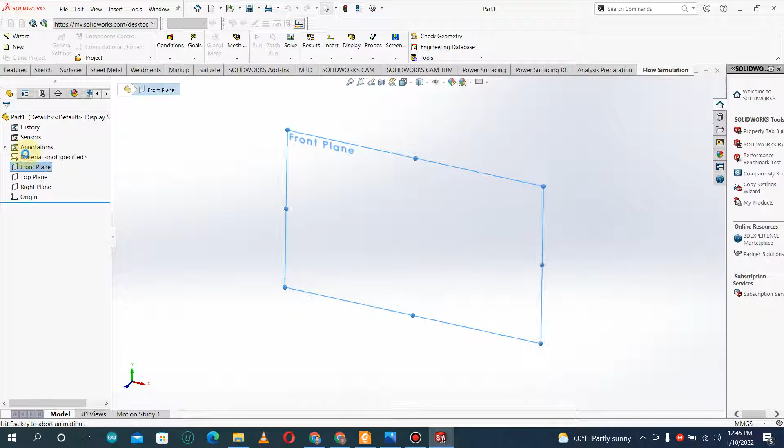Opening the part, this is Solidworks 2021. First of all, I will take an image as a reference in the Solidworks work plane and draw on it. So I have to draw the image in the front plane. I go to the front plane, sketch, and use the sketch picture command. I click sketch picture and browse to where my picture is located, then open it.

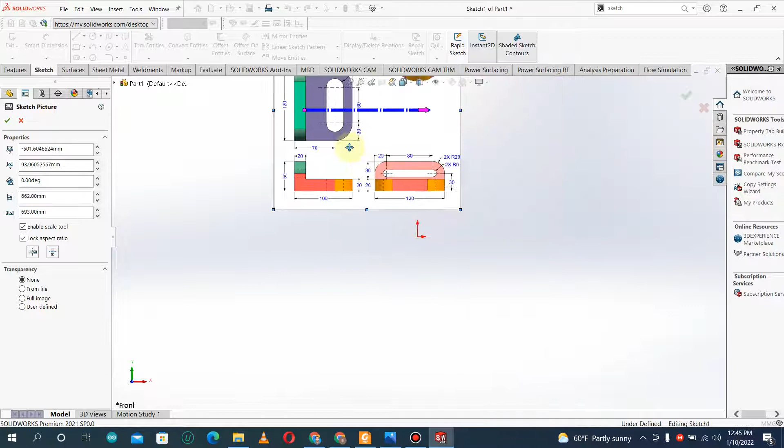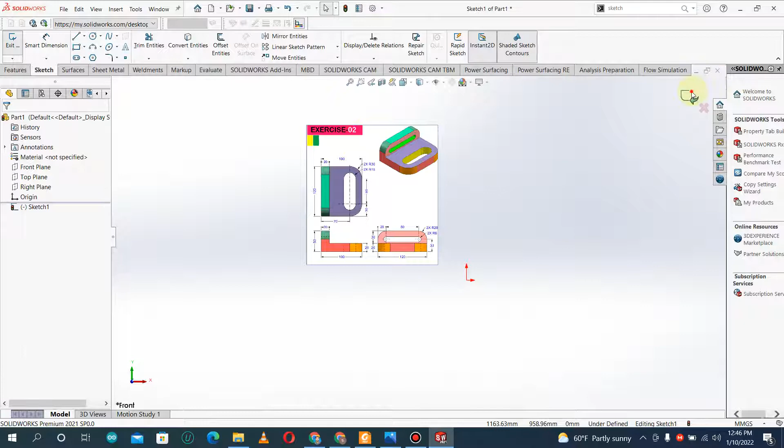This is like a reference instead of opening the file back and forth, looking at the picture and then drawing, which is tiresome. So for that purpose I put the whole image here so we can continue referencing it. I exit the sketch, go back to the front plane, and edit sketch.

This is a third angle projection, showing the front view, top view, and side view, and this is our isometric view. First of all, I'd like to go to the front plane view and start sketching.

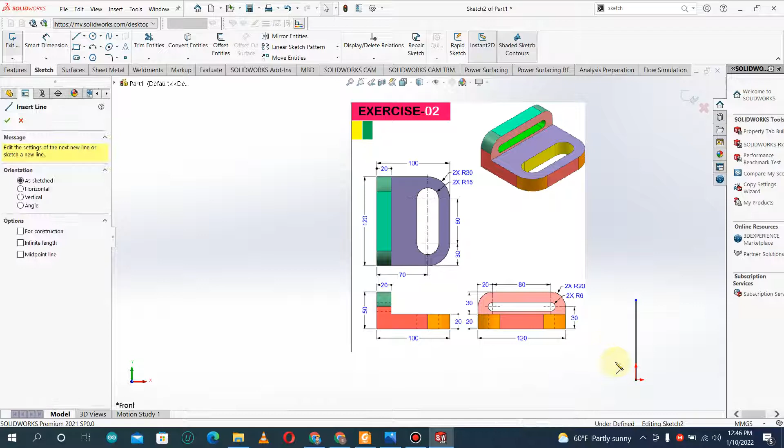I draw a rough line here at an angle of 90, and again a line. You can select the line tool with the command L. Again line, and now I am going to make an offset.

This is a new command for an offset distance of 20 mm. I zoom out and zoom in, click here, and make it 20 mm. So it is now 20 mm.

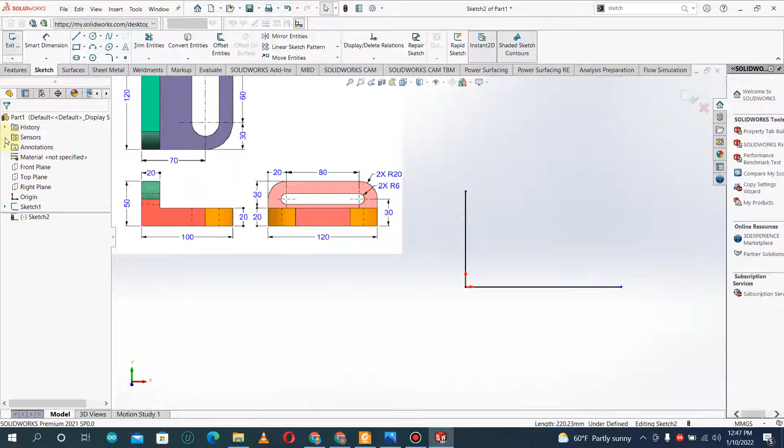Let me put the dimension before that: 100 mm, and it's 50 mm. Now I have to put an offset of 20 mm, and I have to reverse it, so it is reversed, right?

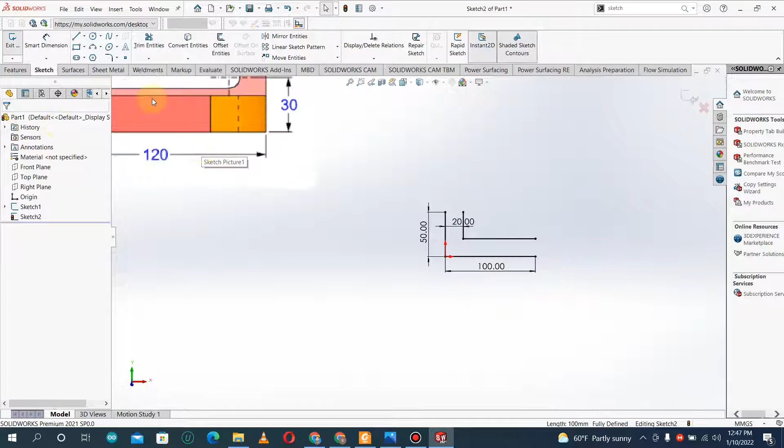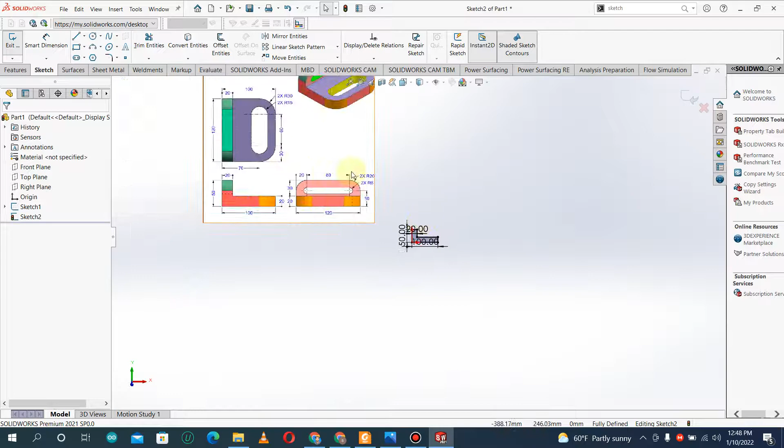Now just draw the line over here, click here and here. Again click L, the line will be automatically selected, and draw over here. So how much this front view is extruded outside - you can see it is 120, so I extrude it 120 mm.

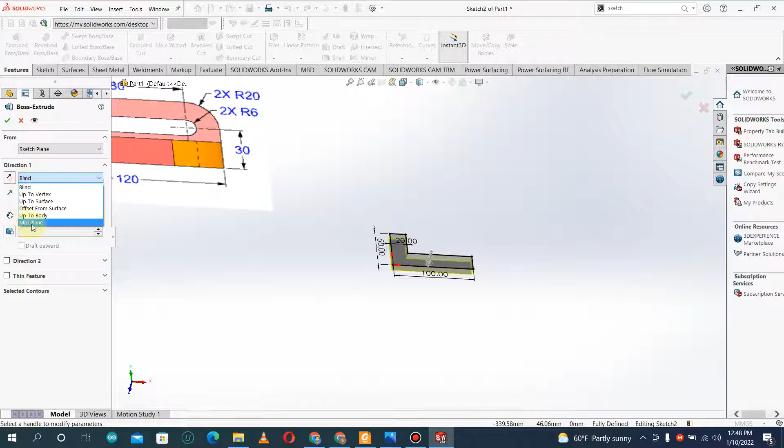Go to the feature, extruded boss. There are different types of extruded boss, so I go to mid plane. It was 120, so I keep it 120. The front plane is here, so it's 60 to one side and 60 towards my side, totaling 120 mm.

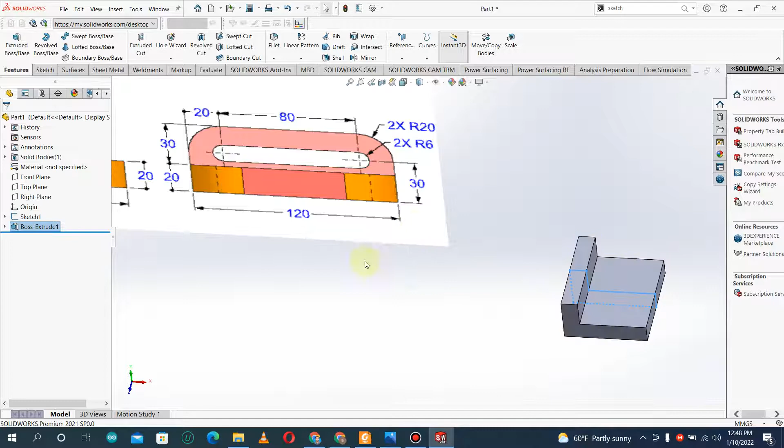So it is done. Now what we have to do is use fillets. It is given as R20.

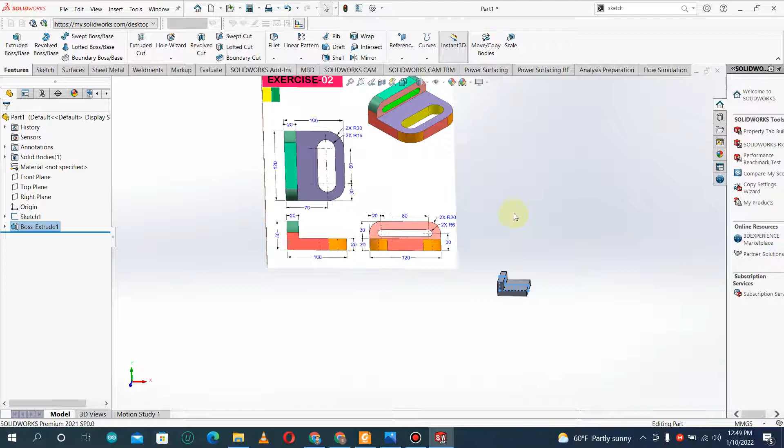First of all, we put the slot over here, right? Then we'll go for the end stuff, that is the fillets. So we will create this hole using the extruded cut command. For the extruded cut we first have to draw the sketch, and we will draw a straight slot. A straight slot would give us this kind of structure.

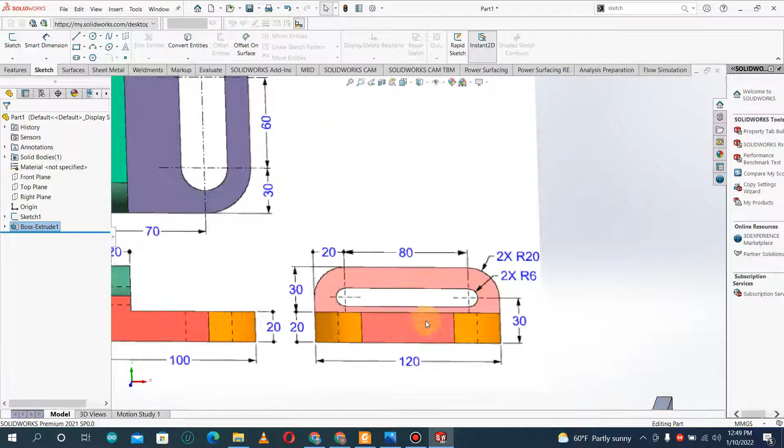First of all, I go to the side view and check this - it's R6 and 80 mm. I go to the right plane, edit sketch, and then use the center point slot or straight slot, adjust straight slot.

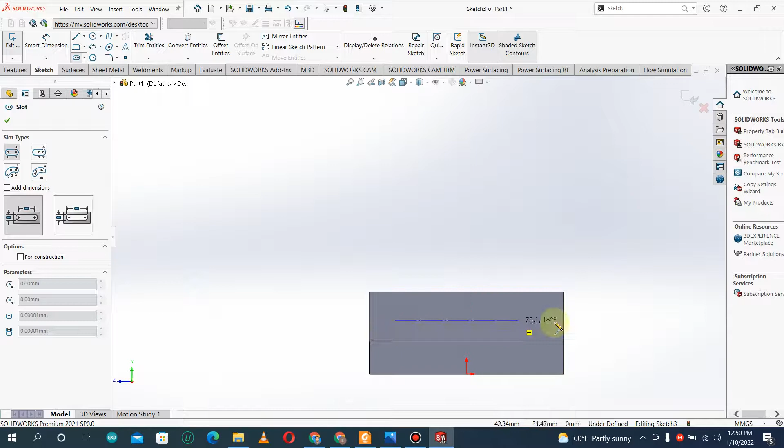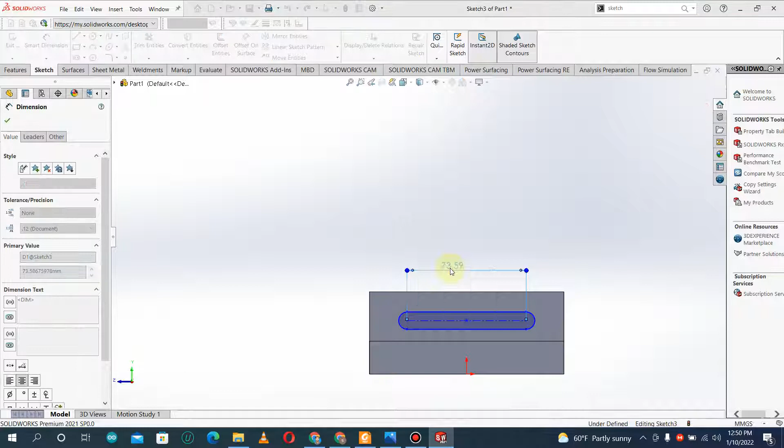You can see just here - now make it perpendicular by clicking this. Now it is centrally aligned. I'll select this and select this, as it is 80 mm, so I put 80 mm, and again R6, so I put R6.

One more thing - where did the sketch go? I can't see the sketch. Can we exit? I go to the sketch and oh yeah, now I got it.

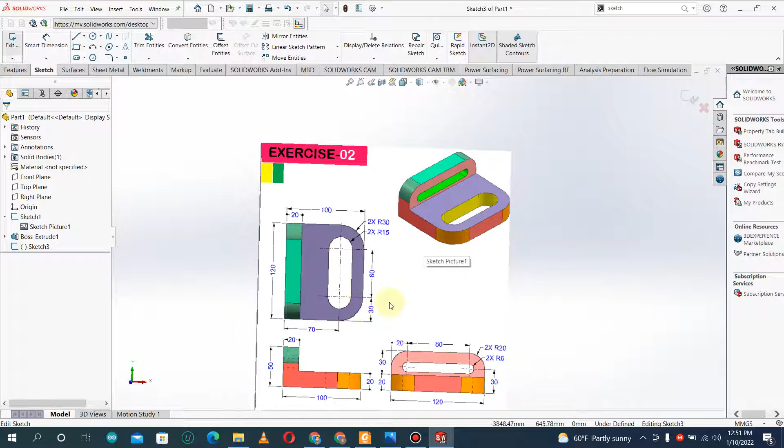I can't see the sketch because it's built on the front plane, so I move this way and go to this. You see the distance from bottom to the center is 30, so I move this again. Now got it - that was a little mistake sometimes we make.

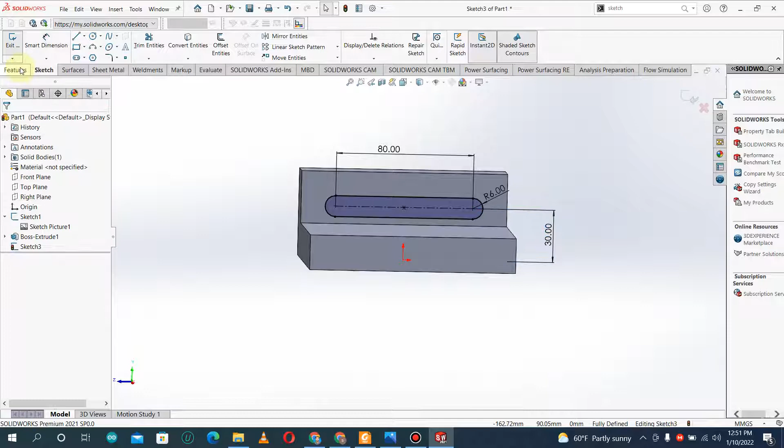Now it's done. Now go to feature and use the extruded cut command, and we want to cut through all, so I select blind through all and it cuts through all.

You can rotate your model by pressing the middle mouse button and rotating your mouse, keeping the central button pressed.

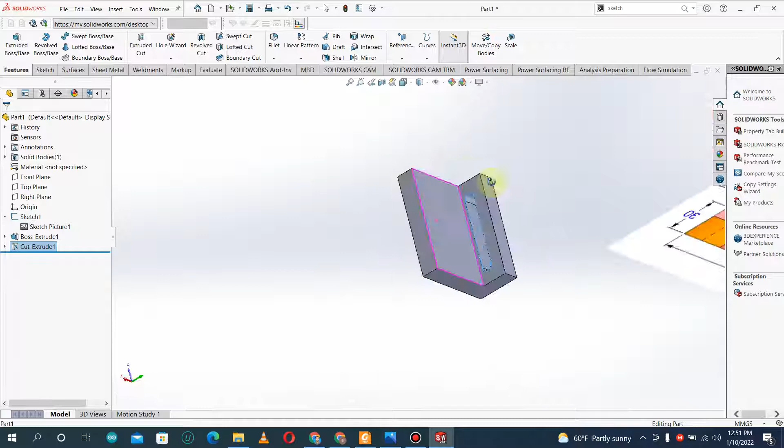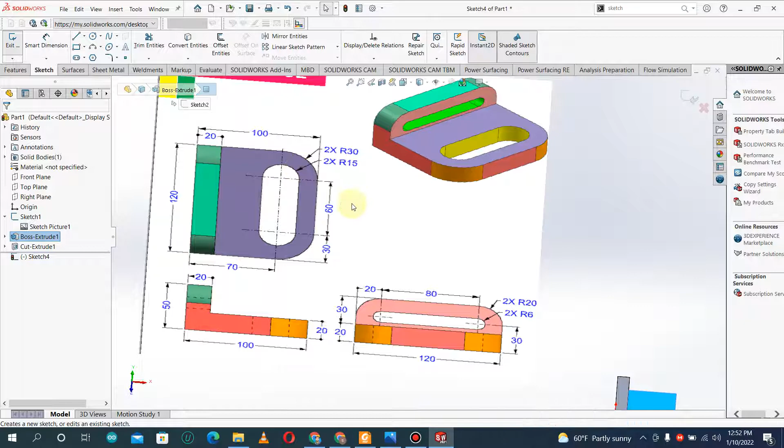Now go to the front plane, top plane, edit - this is our top plane and we have to sketch it. First of all we see here we have to draw like 60, and the diameter is 15, right? Sorry, radius is 15. I go normal to it and just draw a straight slot as before.

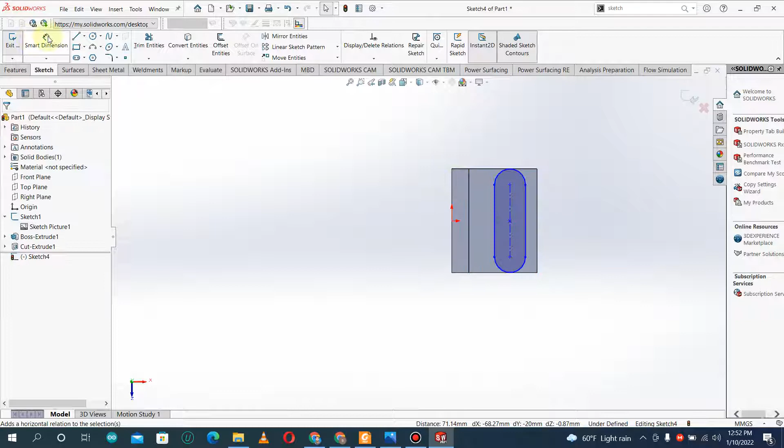Now I have to make this and this horizontal. I put it at 60, and radius is 15.

Let's see what are the actual dimensions. It is 15 for this round circle, and this is 60, and the distance from here is 30. So I keep this distance at 30, selecting from here to here. Yeah, it is already 30 because I centrally aligned with respect to origin.

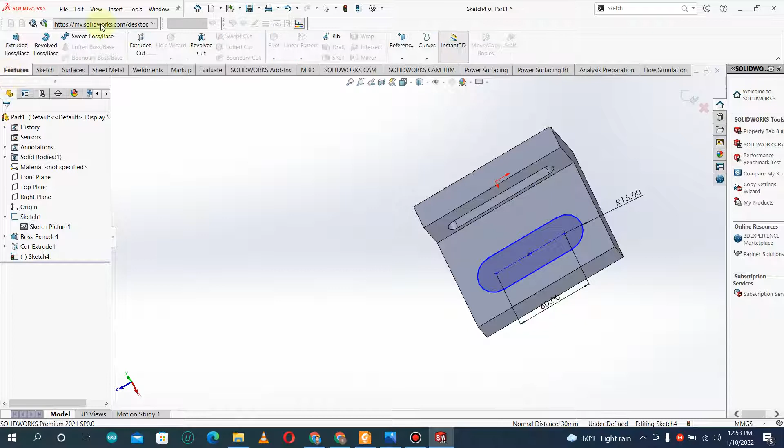Now I go to feature, extruded cut, and select this - blind through all. Now it's done. What I have to do is make all the edges round. The radius of this is 30.

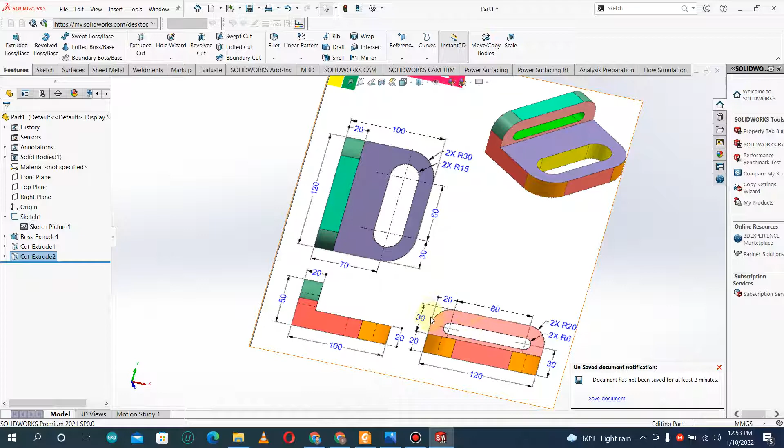For the bottom it is 30 and for the front it is 20. To make this round we use the fillet command.

So where is the fillet command? This is fillet - click here and click here. Now it is 30, click here 30, it is symmetric, and select the constant size fillet type.

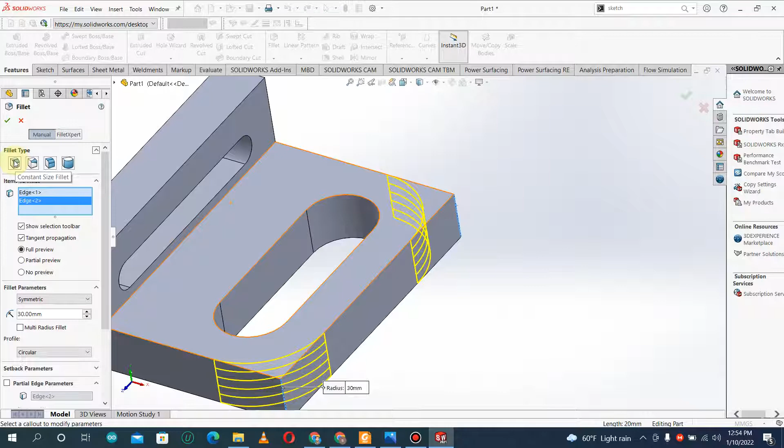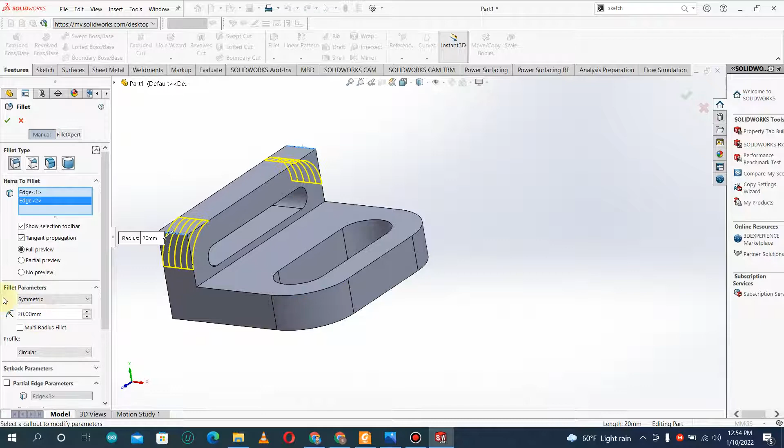Now this one was 20, so I go to fillet again, click here and click here. As we used this previously, we have to change this to 20. So now it's reduced a little bit to 20. Okay, we are okay with that.

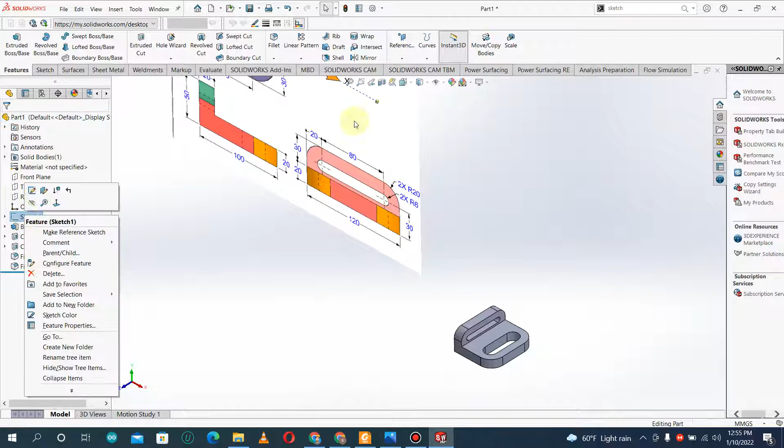Is there anything else remaining? No, I think we're done here. So once you are done with this, you can delete your model's reference picture - go to delete and delete this. So this is our model ready.